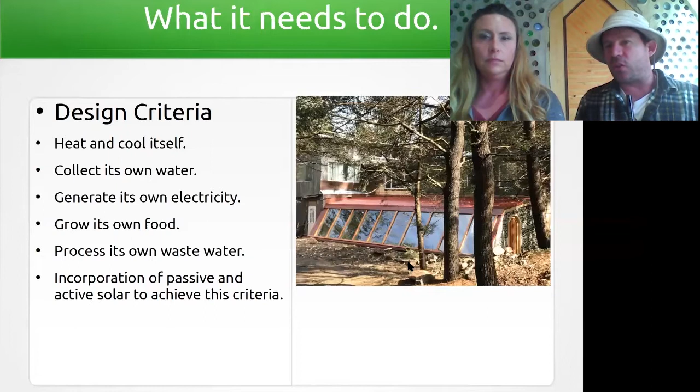That's all you've got to do, is think outside of what's normal and what we're doing with every house we're building today, and just design it to do something a little bit different, or maybe a lot different, depends how you feel about it. I think no utilities for me is a lot different, and living sustainably without the influx of outside resources is a lot different, but it's not going to be different for long - it's going to be the norm.

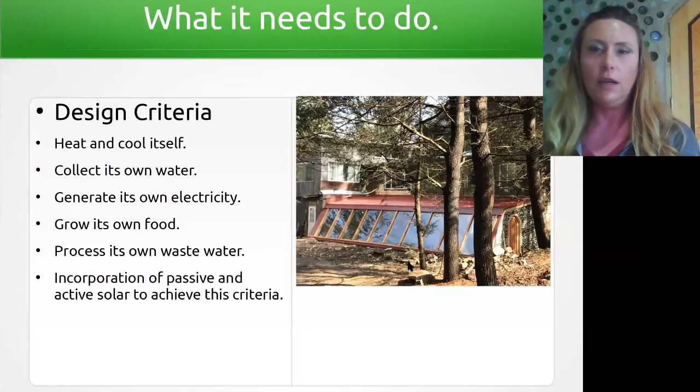In this photo here we have the greenhouse that we're currently sitting in. This originally was a greenhouse that was dilapidated, falling apart, not functioning at all. We came here to do a job to put a gray water planter in for them, and it turned into - why have a gray water planter and plant plants in it when the greenhouse isn't even functioning, especially in this climate? So as you can see, we did a retrofit here at Stonehenge Gardens in Tamaqua, PA, on the side of a conventional house, an old farmhouse. Amazingly, just from adding this greenhouse, it has helped with the heating throughout the home as well.

What we're discussing with the Earthship 2.0, we basically grazed upon the design criteria - what are we designing our home to do, and how are we going to do this with the materials, whether recycled or modern materials and techniques, in order to keep this right there in the same ballpark as conventional housing? I can either pick this house, or I can pick this house.

So let's talk about the design criteria a bit. This is what we want our house to do—no, this is what a house should do. That's the shift right there. Not what we want, but what it should do. And that's what the Earthship 2.0 does.

Heats and cools itself. It collects its own water, chlorine free too—it's kind of nice. Generates its own electricity, so I don't have to pay my power bill.

You can grow your own food in the greenhouse with your recycled water. It processes its own wastewater, so that's less water going to the wastewater plant, less water contaminating our soils, etc.

Human waste throughout history has been the number one cause of disease. Actually, modern day water treatment is one of the major causes of our extended lifespan—not having wastewater just running down in the streams, spreading disease.

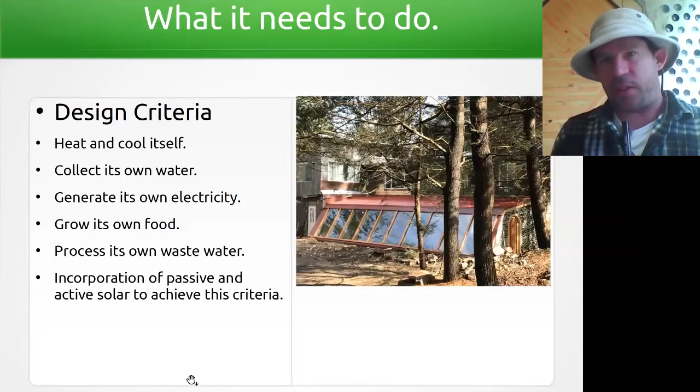How it's achieved is up to the designer. This is how we've achieved it with the Earthship 2.0, and this is what we're building here in Tamaqua, PA. The upcoming academy is focused around that design, around the educational features there, and the actual build itself.

So let's talk about the academy for a second, to make people aware, if they're interested in learning how to make these kinds of buildings, that you guys offer courses through your academy. I believe the first one's coming up in July. July 1st is the first academy session. We're either doing two 4-week sessions, or you can take both and have an 8-week session—it's two months long.

I would encourage the 8 weeks, and there's numerous reasons for that. One, the focal point of this academy is education—really focusing on design, architecture, how these things are implemented, how to have them done yourself or do them yourself. Really, the goal is every person that attends can take that knowledge and go off and do their own. After 8 weeks, that is what we're striving for. And that is really the fundamental approach of this academy.

So our team is comprised of some really great educators with a lot of experience in the Earthship world, founding members of the original Earthship Academy, also implementing their modern knowledge of building techniques that are pertinent to the conventional housing industry, and bringing them back home into the Earthship world.

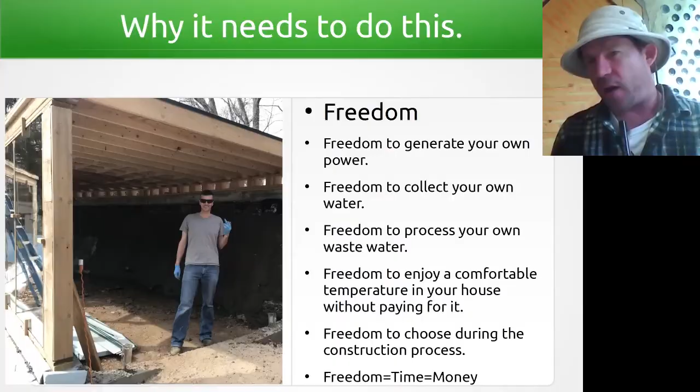So in reality, freedom equals time, which equals money. So this money I'm not spending every month on my utilities, this money I'm not spending to support my house instead of the other way around, is money that I'm trading time for. Time I could be spending engaging with my family, enjoying the weekend, or whatever activities people like to do -- art, leisure, sitting around. But the point is, this is the freedom you're truly getting. And this is what's important as far as our quality of life, etc.

We are the most creative when we are free.

This is during construction -- how does this compare during construction? As you can see, for the most part, it's very much the same as conventional housing, with additional costs for some of the sustainability aspects, such as solar hot water, cisterns, and electric systems. But in this grand scheme, doing it during new construction is not nearly as expensive as adding those things later, and throughout the lifespan of a house, they pay for themselves so many times over. It's ridiculous.

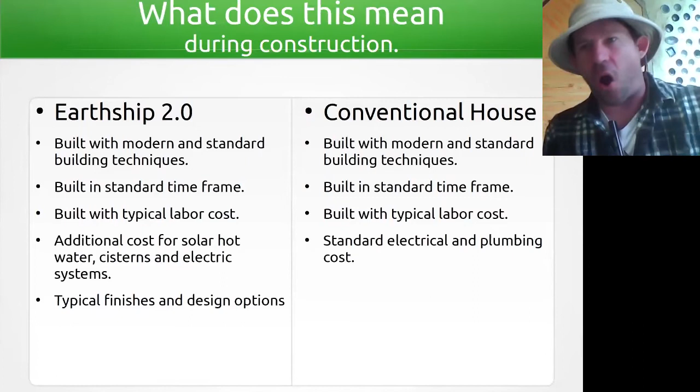The return on investment here is really the only difference as far as the actual construction of an Earthship 2.0, as opposed to a conventional house. And this is what we're striving for. We don't want the construction process to be out there somewhere -- I want to be able to go to any contractor, anyone, with my drawings and say, hey, can you build this? And I want everybody else to be able to do this.

Not some -- I don't want these guys looking at me like, are you crazy? That doesn't get me a permit. That doesn't get me accepted into mainstream society. It's nice to be a rebel and all, but the bottom line is I want people to live more sustainably and actually engage with their housing in order to do so. It has to be fundamentally easy.

At least as easy as building a conventional house, if not more. But let's just stick to as easy as building a conventional house. And I think we really, really have something to step off of there.

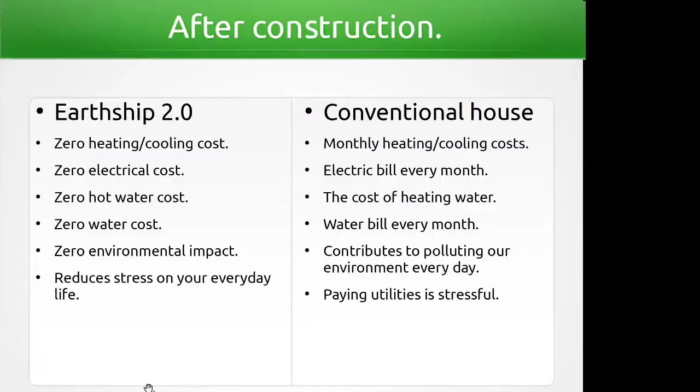After construction -- now this is where the Earthship 2.0 shines. As we saw during construction, except for the addition of some systems, it's reasonably conventional. And I can't stress enough that I can go anywhere and build it, and have it approved without any sort of pushback or having to hire ridiculously priced contractors for whatever special need it may have. Very streamlined. Not to mention the aesthetic stuff, which we'll talk about too, because it's right there on par with conventional housing as well.

But at the end of the day, after construction, when I first move in and enjoy my first month there, what do I have? Or what don't I have? I've got zero heating and cooling costs. They maintain their own internal temperature, right around 73 degrees, which is about the average temperature in which a human is comfortable. Some people prefer 71, some 74, but it's the average.

Is that in every climate? It's for humans in general, the 73 degrees, yeah. Right, because you would change some aspects of the architecture to fit the climate it's built in.

As far as sloping of the glazings, sizing your thermal mass, orientation towards the sun - all this is covered in either our Florida seminar, which is coming up in two weeks, a weekend seminar, or the Academy in great detail. It would be great for you to mention those things in a bit more detail so people understand the considerations when designing an Earthship or Earth home. That would be really helpful.

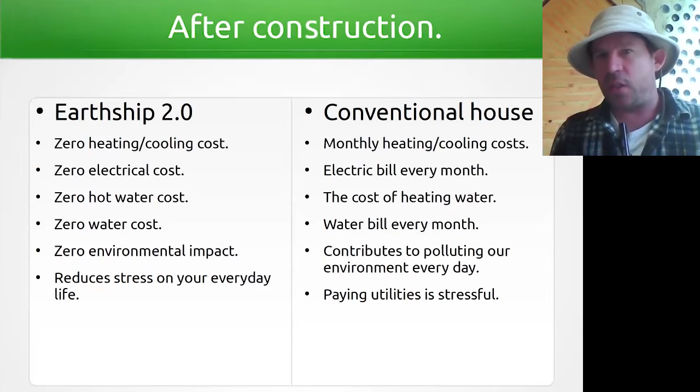At the end of construction, I'm right away with my monthly heating and cooling costs from day one. I'm either heating or cooling the place, or I'm sweating or freezing. I've got a choice - I've got to pay my electricity if I want lights, or else candles aren't cheap either. So I immediately have an electric bill every month. This is the day after construction is completed. I've got to heat the hot water if I want to shower. So I've got to buy the water - I've got to buy water.

No creature on this planet buys water, but I've got to buy it every month. And all this stuff - getting it, providing it - contributes to polluting our environment every single day. I mean just the electricity, the piping, the digging, the wires, the transmission costs, and all that stuff - every single day contributes and contributes.

It's ongoing, the degradation of our ecosystem, plus the energy that's lost in that transmission which we don't account for, and the percentages are outrageous.

Yeah, they are. And back to the stress thing, paying utilities. Now I'm out killing myself, sacrificing my freedom and my time to pay for these utilities, to do stuff that I really, really want my home to just do for me. So that's the real contrast, and it's something that really needs to sink in. If you actually just expected your house to do this, and you looked at a conventional house, you would just be like, what? What's wrong with this picture?

And that's where the shift goes. Eventually in 10, 20 years, people are going to look at conventional housing with this new set of eyes, like, so you're doing what exactly? Kind of like how we look at people walking around their houses today with candles. Or, you know, like coal being marginally outdated. You're still doing what? It's evolving, and as our perspective evolves, people are eventually going to look at conventional housing like, those guys did what back then?

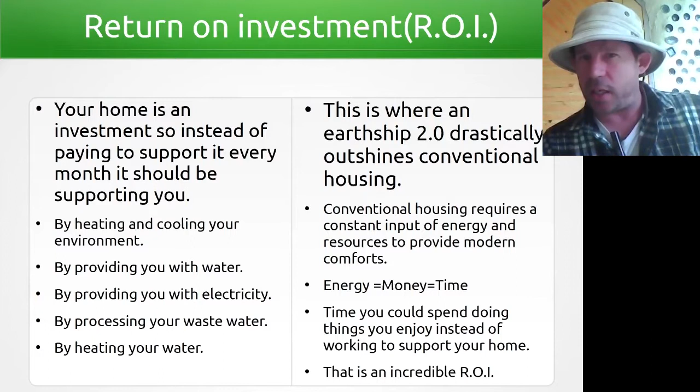That's right. So in 10, 20 years, we're going to look back like, you did what, Dad? You chose a house where you paid for the power, you paid for the heat? We're going to look back and say, why? Because why should I be paying to support an investment every month when it should be supporting me? And if it's the biggest investment of my life, I want to invest in something that's supporting me.

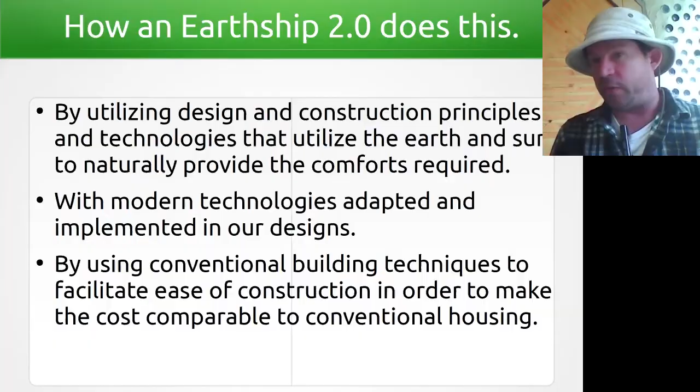All right, so how does an Earthship 2.0 do this? It does this by utilizing design and construction principles and technologies that harness the sun and the earth, actually becoming harmonious with it, as opposed to trying to work against it. They do this in order to provide the natural comforts we require. Humans have a very narrow temperature range in which they're going to live, let alone be comfortable. And the earth, if we build with it correctly—that's where you see the earth berm, etc.—because 3 feet down, anywhere on the planet, the earth's natural temperature is 57 degrees.

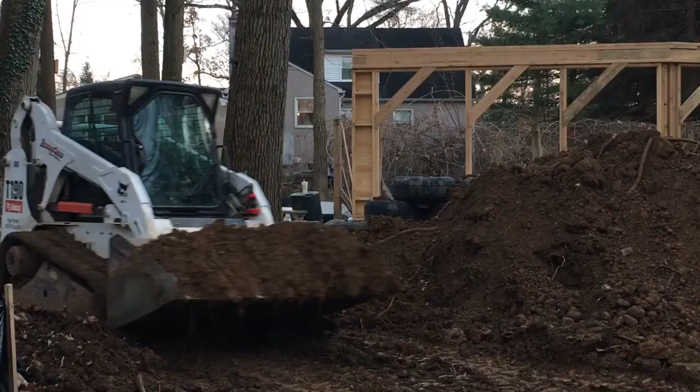Back up to talk about the earth berm—what is it, how does it work, and how is that part of an Earthship? And orientation too, probably. The earth berm actually embeds the structure within the earth, ties the structure into the earth, and it's on the north side. So it's tying the structure into the earth, which is naturally at 57 degrees, 3 feet down, anywhere on the planet.

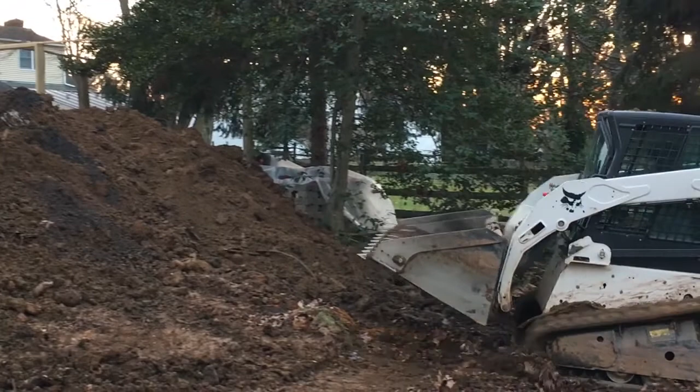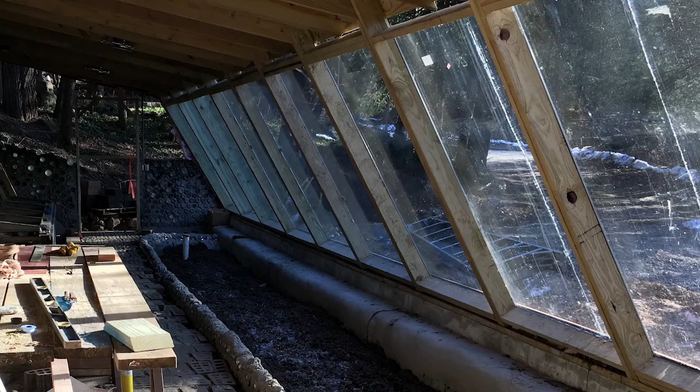So I've got 3 sides of my building tied, encapsulated by the earth itself, with the earth being at 57 degrees. Getting to the human comfort range of around 70 to 72 from 57 isn't a huge jump, though 57 we'd find chilly. So I still have my south face there, and I'm using the sun to get that jump in temperature when it's cold out, capturing and storing the sun's energy in this earth berm behind the building.

I'm storing a portion of it as a battery around the building, to be re-released as the building temperature drops. Energy will always travel to where there's a void, more energy to less—it's basic physics. Energy will always fill the void until equilibrium is maintained. So this berm becomes a back and forth battery of energy into the living space, which we showed in a picture here.

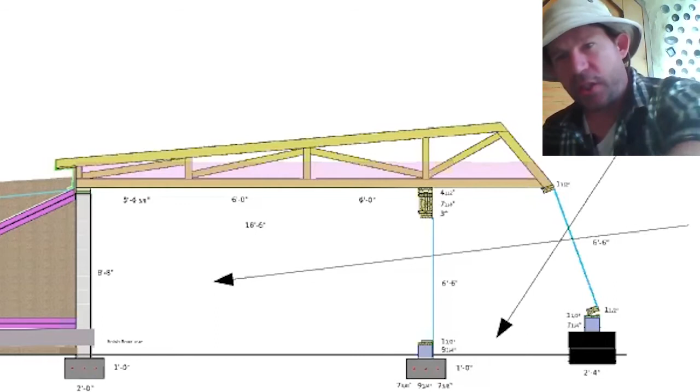So this is coming through and heating this area in the back here, including these pink lines you see—that's an isolated mass of earth behind the building, isolated by insulation from the rest of the structure, except through this wall. This wall is your two-way door in and out of the building for energy—by door, I mean energy can freely move in either direction.

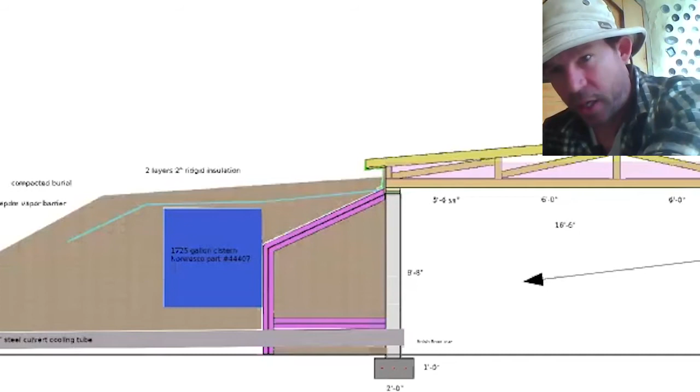So we're going to talk about this in two instances. One, when it's cold: during the day, on my horizontal line here, I'm heating this mass as well as the space all day, and it's stabilizing and absorbing energy, jumping from 57 towards 70, 72, 74, getting warmer as it absorbs this solar energy.

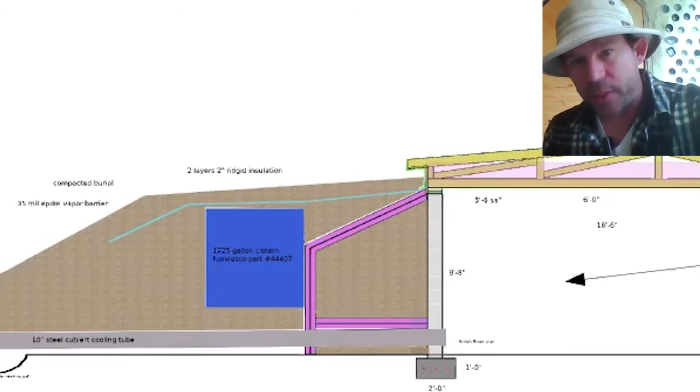Now when nighttime comes and it's still cold, my energy is going to start moving as this space tries to cool, re-radiating in the other direction back into my living space. So I'm getting the sun all over again by virtue of this mass, because this massive area is around the whole building—it's 90% compacted fill. You're encompassing truckloads of earthen battery that's re-radiating back into the building, maintaining a very stable and comfortable temperature, right around 72 degrees.

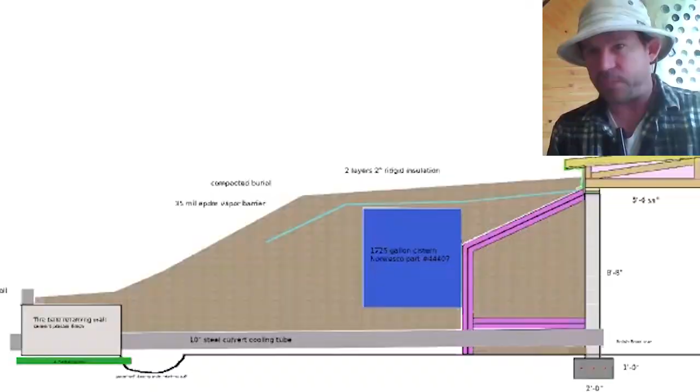In traditional, original earth homes, the berm was built with tires that were compacted with earth. The back wall was then backed by the earthen berm, right? Yes. So now for the back wall, are you still using compacted tires, or something else in 2.0? In the 2.0, we're using poured form block.

And the reason we're doing this goes back to the fundamentals within our design criteria: ease of construction, ease of permitting, easy to be accepted and implemented in modern society. I am a big proponent of pounding tires, but it's very labor intensive—you're taking a house and adding a third more to the price. Trying to market or incorporate that in society is going to be very, very tough, with very little additional benefit, if any, into your end result.

You've got to find someone who knows how to do this, very specialized in its techniques. This is your standard foundation. You can call up any region, any area, have this blocked and poured, and it will still do the exact same thing, because all you're doing is transferring energy in and out of this battery. So a conductor is a conductor in that realm, and that's what this wall is acting as. Your battery is contained within this insulation in the back. Back to your design criteria, this is a big part of streamlining this into modern society.

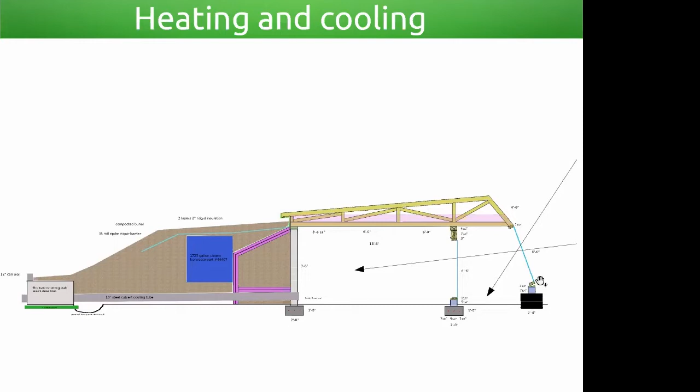Now my furnace in the front is redirected up here - by virtue, the sun is being directed not into my living space. It's no longer charging my battery there. But my battery back here still wants energy, it's still looking for that transfer, and because of the season, it's not there anymore. So what it's doing is pulling the energy out of my living space, and that energy is what's making me hot. By removing this energy, my battery going the other way trying to recharge itself, I'm cooling the space by virtue of that.

And also, while this is happening, I'm using the natural convection of my greenhouse in the front. You see this gray tube here? While this is still getting warm in the front, it's pulling this cool air through the berm, up and through my living space. So it's coming in from behind the berm? Yep, right through the berm where it's coolest, and it's coming right in, all the way to the front and through the greenhouse. This is acting as an engine now for pulling air, because as the air gets hot here, it's venting out through the top. So this furnace we had is now acting as an engine to convect the air through the living space.

So we're cooling it in a couple different ways there, through the mass being hungry for energy and pulling it out, and by pulling fresh air through this berm, which is cooler than ambient temperature, through the living space, providing cooler air and ventilation, powered by our greenhouse again. Our greenhouse really is a multifunctional tool in respect to this building. It's the engine, it's the furnace, it's what's really helping with this climate control.

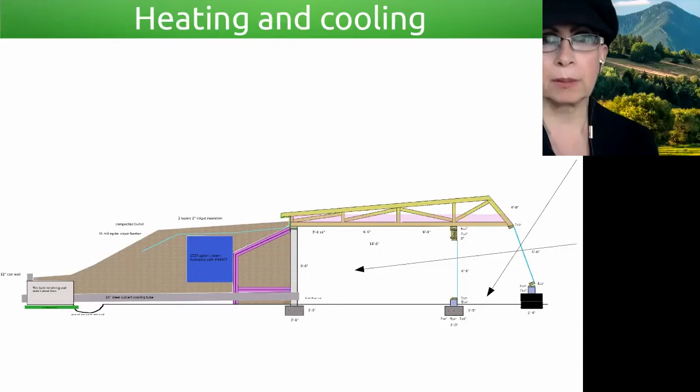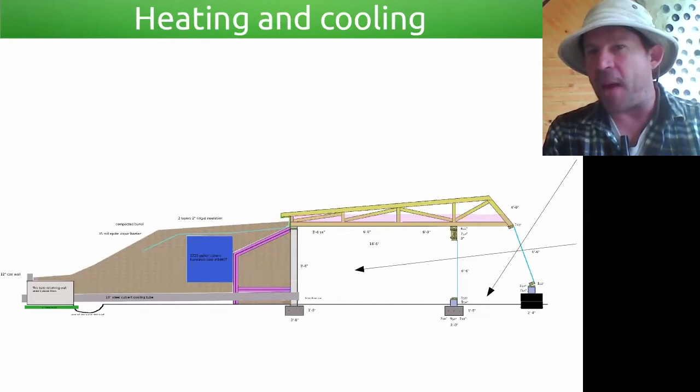And how big in this diagram, it looks like the berm is as big as the living space and the greenhouse combined. Is that a particular proportion, or just this diagram? It is a relatively normal proportion. Because you are encountering the earth, you are using the earth's natural situation to your benefit here, so you require a mass in the back for energy storage and release.

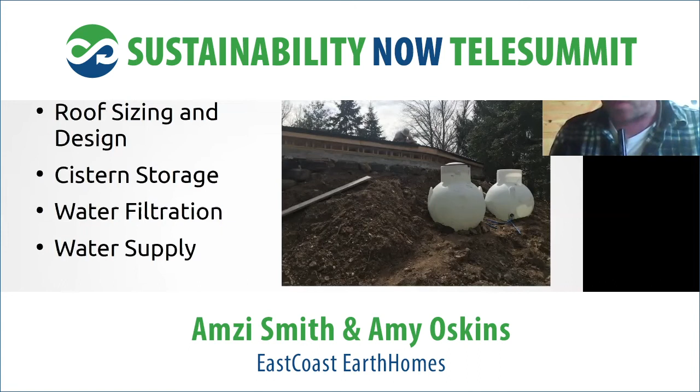Okay, great, so we're talking about providing our own water. Well, it rains, water comes from the sky all the time. So we're simply catching it, sizing our roof appropriately for the climate we're in to make sure we catch enough for the occupants per day, week, year, etc. And channeling it into these cisterns where from there it's plumbed into the house. So we're catching our own water, which is readily available from the sky in Pennsylvania, more so than some areas.

Storing it for domestic use behind the building in the cisterns. And those cisterns get buried, right? Yes, they're buried, incorporated in the berm to prevent any exposure, UV, etc., and keep them cold because the berm stays cold.

And when you say sizing the roof appropriately, what kinds of considerations are you really looking at in terms of options for sizing the roof? Isn't that going to be determined by the size of the building? Not necessarily. The roof's minimum will obviously be determined by the size of the building, you're not going to get away from that.

But if I'm in a desert, I would add things to it. Basically I would figure it out from my yearly expected rainfall, how much I need, how big the cisterns need to be to accommodate. I wouldn't just look at the yearly rainfall, but how it comes throughout the year, whether I need to store for long periods of time. On roof sizing, you'd add awnings, overhangs—you can enhance your roof size without a tremendous impact on your actual housing, basically making it cheaper to make your roof bigger. Which is something you can incorporate if you want to do water catchment with a conventional house as well.

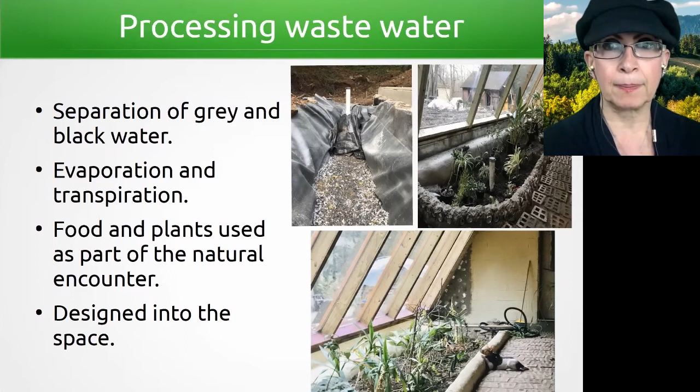They have an affinity for it, they like it. So you line this hole with rubber, and then what's next in setting up this basic system? What we're doing, as you see in the first picture, is fill the bottom with gravel, big one-inch gravel. That creates voids for storing water and also creates flow through there. So basically it's an underground pond, an underground aquifer.

All these plants you see in the picture, their roots are working their way down there, and the soil is wicking this moisture up into these roots. These roots are harnessing or tapping into this water supply and consuming it. So as I take a shower, I can come down here and see my water causing these plants to grow. They're consuming it, they're enjoying it, and I'm not dumping it on the ground outside.

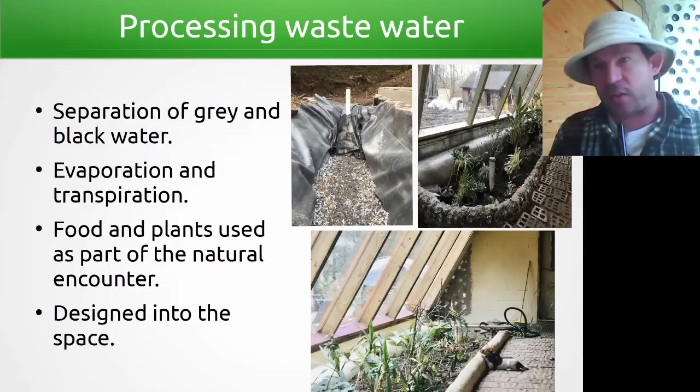It's like a lasagna layer—we put the gravel in there, and above that you can put a variety of different things as well as your soil. So we make sure that whenever we shower, or use dish soap or laundry detergent, we use biodegradable detergents or soaps so that you're not killing your plants, as well as the fact that in our homes we grow our own food. We just want to stress that.

So these planters work very well—you do the gravel, then a layer of different things like peat moss or straw, and then your soil, and you can grow amazing things in them.

Is there no problem growing plants that you eat from the gray water? No, because the plants process it. You wouldn't want to plant things in your black water planter though. But you can grow amazing trees in your black water planter, especially where we're from in the desert—you can definitely grow amazing things. But inside the home, in your gray water planters, you can grow amazing food and beautiful plants.

I guess we're at the bottom line, and I think truly the bottom line is that big paradigm shift from our supporting our home to our home supporting us. In so many ways that's a phenomenon. In the future, people are going to look back and say, you used to do what? Why is our paradigm not including the home supporting us, like being its own biosphere? They are. My kids will probably be like, 'What? So your dad did what?'